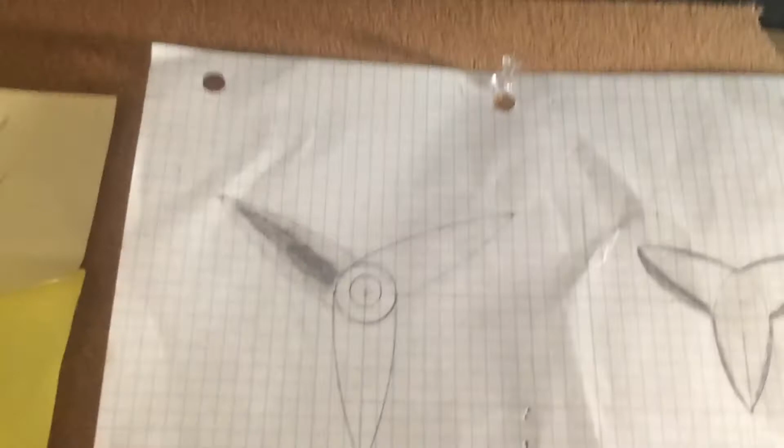So here are some designs I had for this rocket. I was planning on having the nose cone open up, and then the thrust vectoring mount would pop out from the nose cone and start actuating. I've seen SpaceX and this one guy, Joe Barnard, who kind of inspired this project. Both of them have landing gears on the outside of their rockets that flip out as it's about to land.

I thought it'd be interesting to instead have the nose cone open up, which reduces drag on ascent. If I wanted this to go up and come back down, the nose cone opens up and you don't have to put landing gears on the outside. That reduces drag, and you should be able to get a higher altitude apogee by not having landing gears sticking out.

But I might ditch the opening nose cone idea because it sounds pretty dangerous in itself. Having a nose cone with creases on the inside might actually hurt the aerodynamic drag more than just putting landing gears on the outside. If you had 3 creases where the nose cone folds out, and say the servo that closes and opens it doesn't close all the way or changes during flight, that thing could get ripped open and all sorts of things could go wrong.

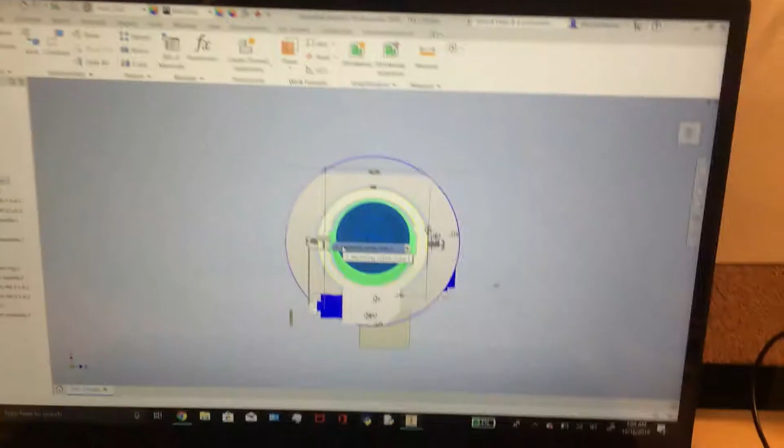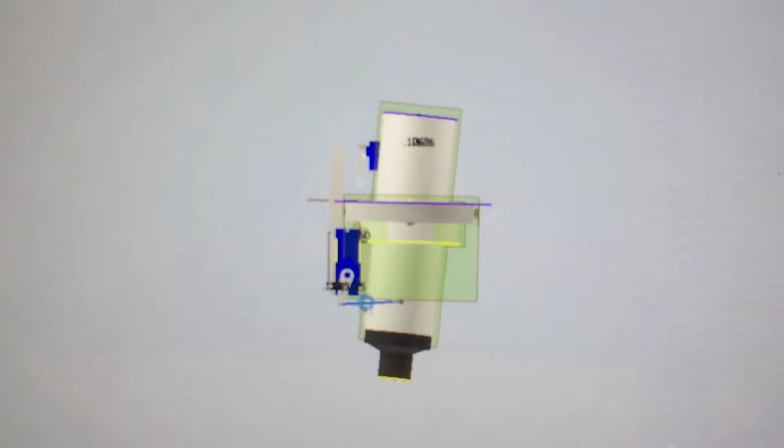Alright, on to my 3D model of my thrust vectoring mount. This is what it looks like from the right side view. It'll actually be able to pivot in the back view, by the servo motor - it pulls it this way using a linkage stopper, kind of like what they use on RC planes, pulling it back and forth and controlling it in the Y direction.

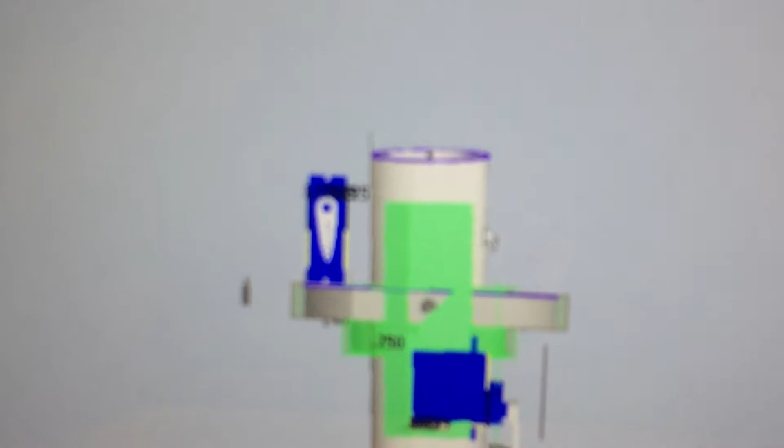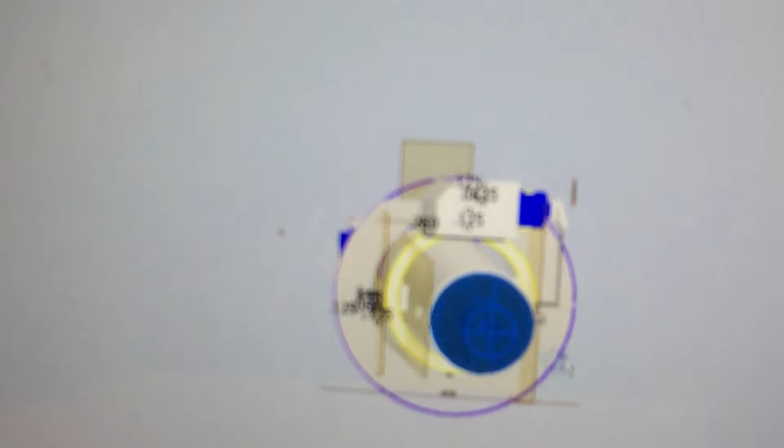This whole thing, including the servo motors, will be actuated by another servo motor and rotate against this axis. So altogether, when you move one motor and the other motor in conjunction, you get this combination of different motors moving, allowing circular motions - you get almost all degrees of freedom except roll, because you can't account for the rocket rotating around that axis with just these two axes, the X and Y axis.

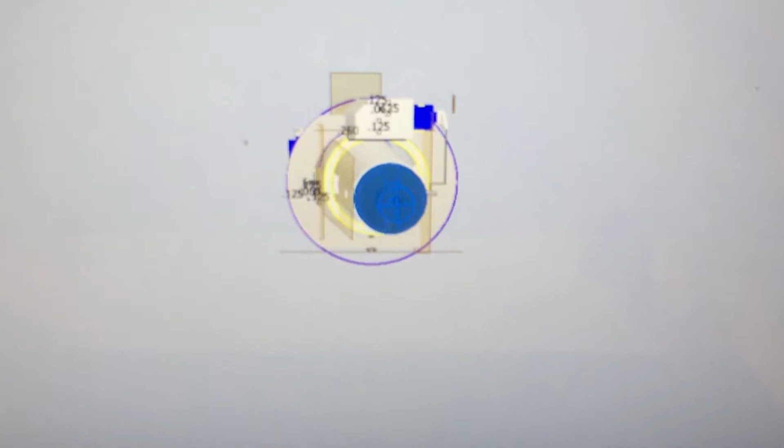So yeah, that's my 3D working model in CAD. I'll probably get this printed out. My expectation is by October 17th, but who knows - hopefully I'll get that done by then, and then I'll be able to keep this whole vlog updated.

So essentially what I have for this rocket - I'm going to use this pen as a demonstration. This is like the nose cone of the rocket, and this eraser is the thrust vectoring unit. The first part I'm not too sure about, but somehow I'll get the rocket into the air, maybe by a drone or possibly another rocket, who knows. The main part is landing it.

Once it's in the air and falls down, somehow either the nose cone will open up or the thrust vectoring mount will shoot hot gases depending on how it's falling. Say it's falling this way, it'll shoot gases this way so it can rotate itself. It won't be this dramatic - it'll be more like plus or minus 5 degrees to stabilize itself.

So either the nose cone opens up, fires hot gases, stabilizes itself, and lands itself—it'll be awesome. Or the nose cone doesn't open up because that's really complicated, and it just ends up falling. There actually will be no nose cone, and it just falls straight down, with the thrust vectoring tube landing itself instead of the nose cone opening up. Landing gears could pop out to help it stabilize itself on the ground, so it has something to not pivot on.

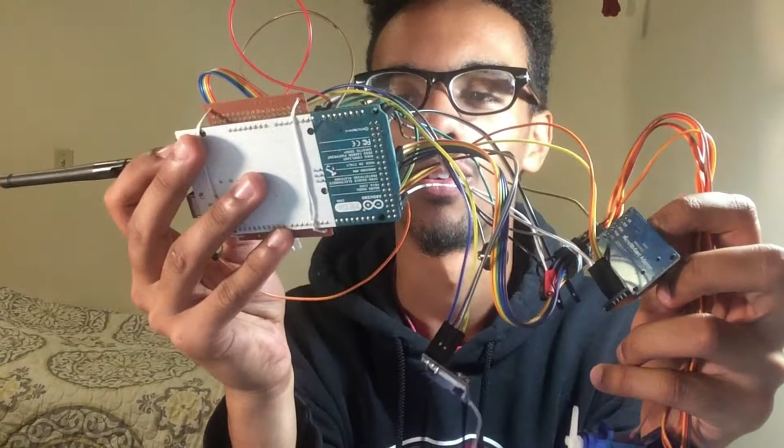Alright, and on to more of the hardware, electrically speaking. So this is just a pile of junk right now—nothing's really working, nothing's really plugged in correctly. I don't have everything wired neatly; it's all just kind of slapped together to make sure everything would plug in at the right spots, and I'd have enough ports open, especially for the I2C bus and the SPI bus. There are so many things that connect to that.

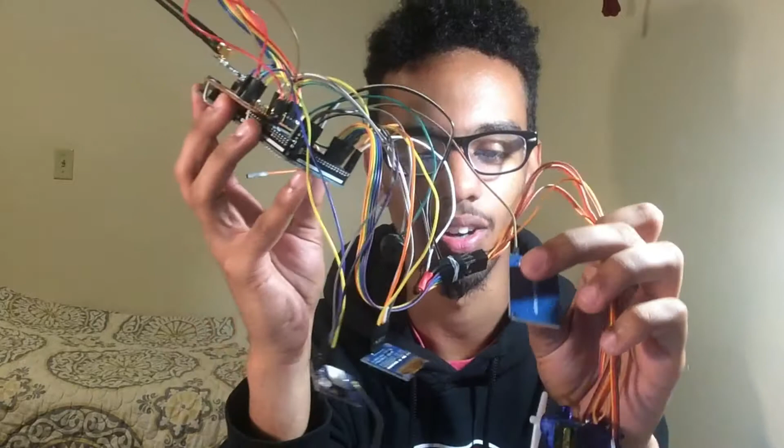Like, for example, this micro SD card, this OLED display—what else connects? I think this receiver, or actually it's going to be a transmitter on the rocket, uses SPI as well. And I think that's about it, but having all those connections and using the Arduino Mega is actually pretty helpful.

Because the Arduino Mega has like 52 outputs—something like 53 digital outputs—so they're all pretty much capable of supplying all the demands I need for SPI and I2C protocols. So basically what I'm planning on doing is having these 4 servo motors.

These will either control the nose cone opening, and/or some servo motors will actually control the gimbal. So 2 of them will be dedicated to the gimbal thrust vectoring unit. 1 of them will be dedicated to hopefully either opening the nose cone as it falls, or it'll be used for opening the landing gears as it falls, depending on which route I take.

And then I went ahead and just plugged in an extra servo motor, because I might use that for, who knows, maybe a backup parachute deployment—there are multitude of things you can use this for. I'd rather plug in 20 servo motors and not have to figure out different spots to hook them up later, than end up not having enough servo motors.

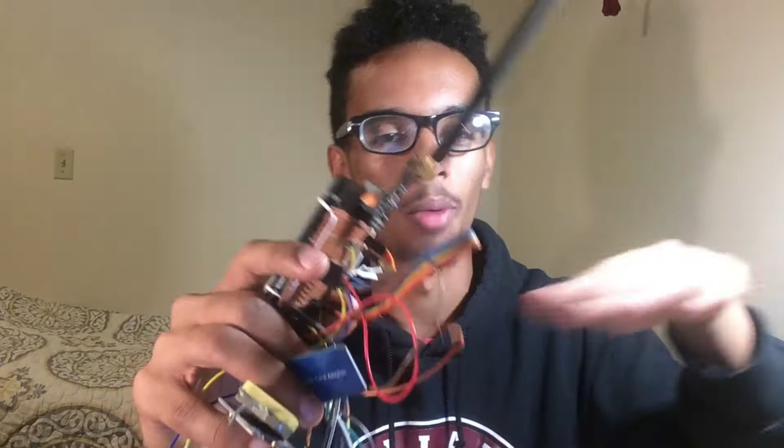And then I have this transmitter. This might be useful for deploying a parachute just in case the thrust vectoring unit doesn't start working, or landing gears don't pop out. If anything were to go wrong, I could always send a signal to this rocket, and the receiver would try to override, or stop whatever processes the processor is doing, and would deploy a parachute. So instead of continuing to try to fire the thrust vectoring unit, even though maybe a wire is disconnected, you don't know, it would override that and just deploy the parachute, so you don't end up losing a lot of time and effort in building this rocket.

So yeah, I think that covers just about everything except for the blue LED. You can't go wrong with a blue LED. Blue is my favorite color.

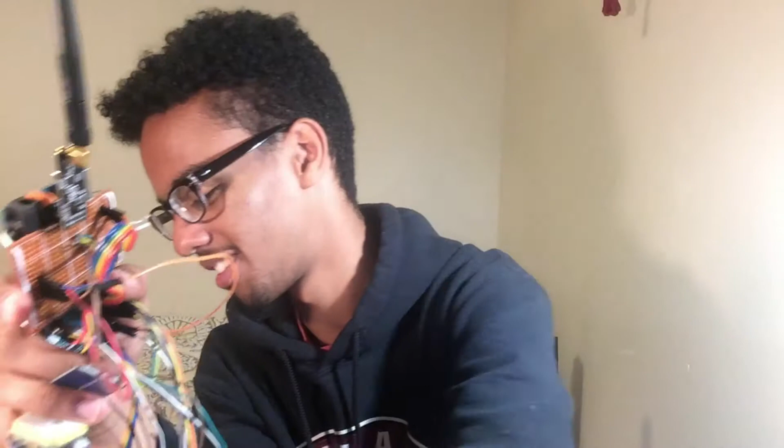And then of course all of these, hopefully if I can figure out this whole solenoid valve situation, if I want to invest in better solenoids to actually get more airflow coming out of these, hopefully I'll get to use these on this, and this will control this.

Oh yes, last but not least, on the inside of this, kind of buried underneath it, but you can tell, these wires are connected to a 10 degree of freedom Adafruit kind of deal - gyroscope, accelerometer, pressure sensor, temperature, magnetometer, which I thought was pretty interesting. All that I soldered on underneath this breadboard on the inside. I mounted it in the center of this, so this whole thing could sit in the center of mass of the rocket, where the electronics bay would go. That would measure how fast it's going, where it is, where it needs to be, all those kinds of readings.

It would be helpful if it had an IMU that already did a Kalman filter on it, but this version I don't believe comes with that, so I'm just gonna end up hopefully coding it myself and learning along the way on how to do that kind of stuff, knowing how fast you're going. I think that's using quaternions or something, some higher level math that I'm doing right now in Calc 1 for Engineering 101.